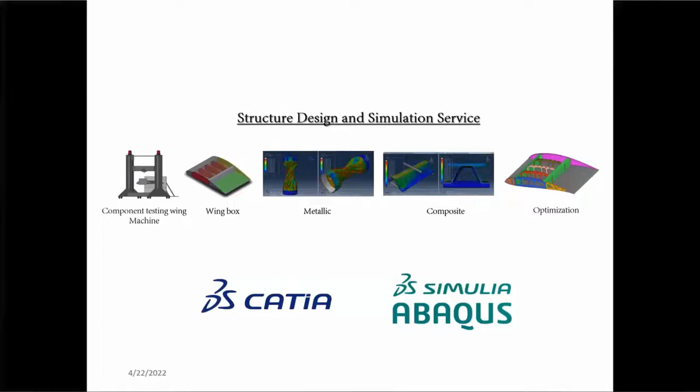ที่เป็นคาร์บอนไฟเบอร์เพียว 100% และสามารถรับแรงใช้งานได้จริง มีค่าความแม่นยำระหว่างการทดสอบกับ FAE ไม่เกิน 10% ซึ่งถือว่าน้อยมากในระดับ component testing ทีนี้ขอพูดภาพรวมก่อนว่าโปรเจกต์นี้ GISDA ร่วมทำกับมหาวิทยาลัยบูรพา กับ ดร.ลอเรนซ์ และบริษัท Aerowork โดย Aerowork สนับสนุนด้านการผลิต manufacturing ส่วน ดร.ลอเรนซ์กับ GISDA ร่วมในเรื่องเทคนิคการออกแบบและการทดสอบ ซึ่งเรามีการทดสอบไล่มาตั้งแต่ coupon test, element test, component test

level และ full scale ซึ่งการทดสอบเหล่านี้เราใช้ facility ของ GISDA ทั้งหมดในห้องปฏิบัติการ Galaxy เริ่มแรกเราต้องหา material property เพื่อเอาไปใส่ในซอฟต์แวร์ Abaqus โดยต้องทำการเทสก่อน สิ่งที่เราเทสก็มี tensile, compression, in-plane shear แล้วก็ flexural strength

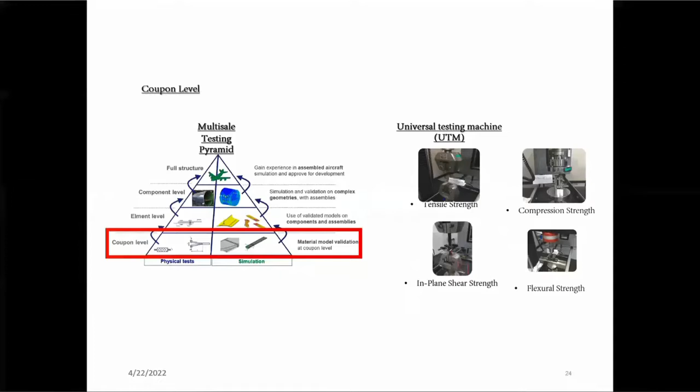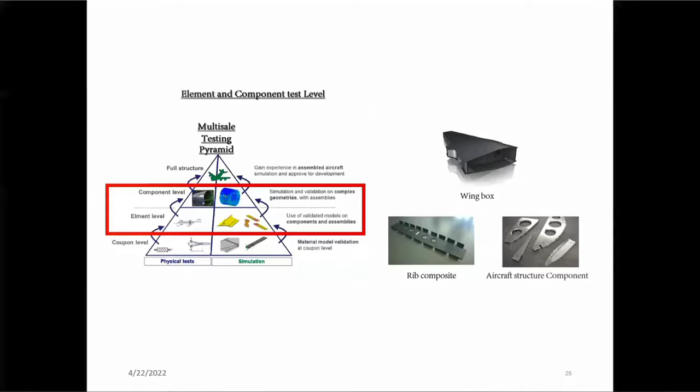พอเราได้ค่า property ของวัสดุ carbon fiber มาแล้ว เราก็เอาไปใส่ในซอฟต์แวร์ Abaqus ในฟีเจอร์ material property พอได้ material property แล้วเราก็ออกแบบโดยใช้ CAD computer design มาออกแบบริบในระดับ component element level ก่อนที่จะไปประกอบเป็น wingbox โดยใช้วิธีการทำ FEA อย่างภาพแรกเป็นริบของตัว spoiler และตัวล่างเป็นริบที่เป็นคอมโพสิตที่เราพัฒนาขึ้นมา เราเริ่มจากการทำเล็กๆ ก่อน

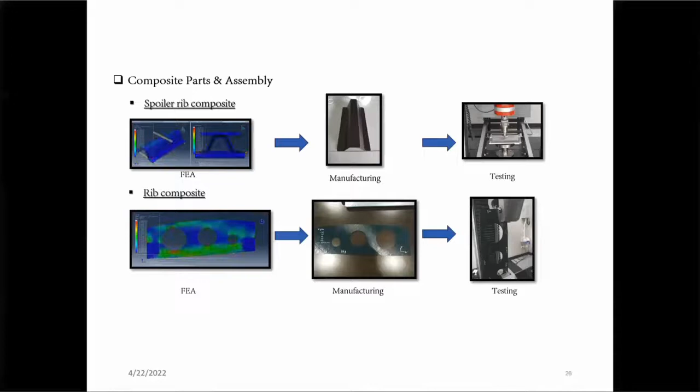แล้วก็มี manufacturing เอาที่ออกแบบจากซอฟต์แวร์ Abaqus มาทดสอบ มาผลิต แล้วก็เทียบค่ากัน ดูว่าค่าที่รันออกมาจากซอฟต์แวร์กับค่าที่ทดสอบจริงเกิด error กันเท่าไหร่ ซึ่งในระดับ element test ไม่เกิน 5% ตรงนี้เป็นค่า reference ที่ยอมรับได้ เราก็เอาไปพัฒนาต่อออกมาเป็น wingbox

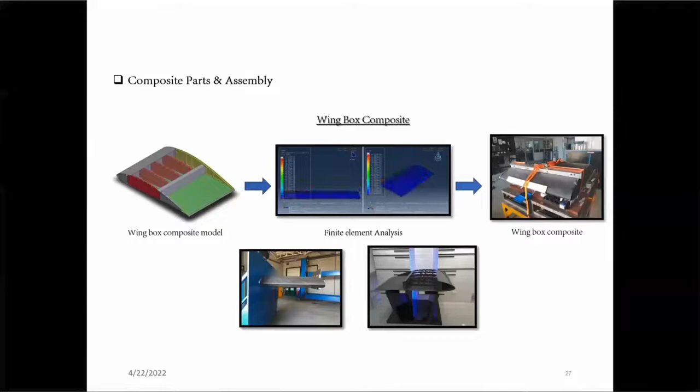wingbox ในระดับที่เป็นส่วนหนึ่งของปีกเครื่องบิน โดยใช้วัสดุคอมโพสิต ใช้คาร์บอนไฟเบอร์เพียว 100% ทั้งหมด แล้วใช้ Abaqus ออกแบบการเสริมแรง ว่าต้องใช้กี่พาย ใช้ direction ไปทางไหน orientation เป็นยังไง stacking sequence เป็นยังไง ซึ่ง Abaqus สามารถใช้ในการออกแบบได้หมดเลย

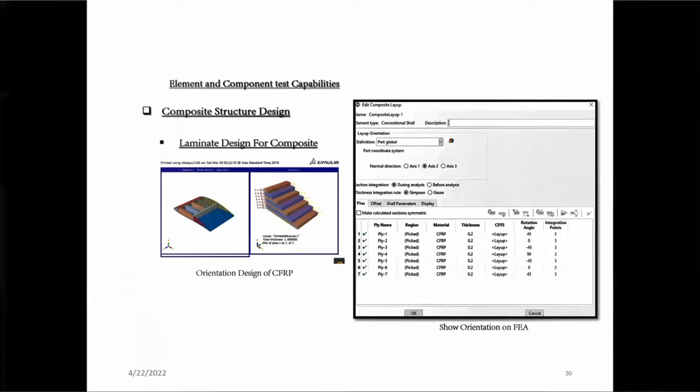นี่คือหน้าตาฟีเจอร์ของ Abaqus ที่เราใช้ในการออกแบบ และนี่คือการออกแบบดีไซน์ในเรื่องของ stacking sequence Abaqus มีในเรื่องของ layup แล้วก็ใส่ material property สุดท้ายพอเราใช้ Abaqus ออกแบบ composite wingbox มาทั้งหมดแล้ว เราก็ต้องมีการทดสอบในระดับ component test เพื่อเปรียบเทียบค่า

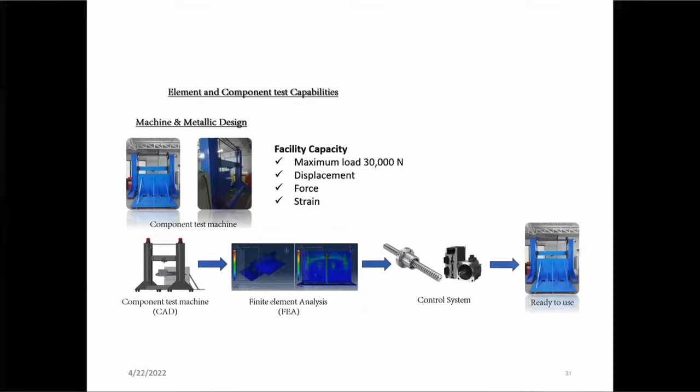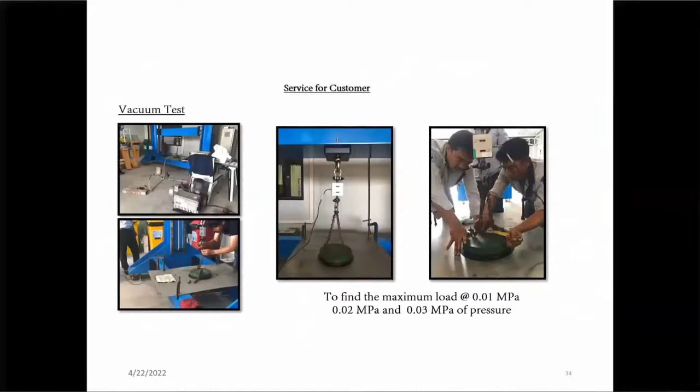ไม่ว่าจะใช้ strain gauge, load cell, หรือ displacement ในจุดที่เราสนใจ อย่างเช่นจุด peak load ที่เกิดขึ้นบน surface ของ carbon fiber เราก็เอา strain gauge ไปแปะแล้วทำการทดสอบใน condition เดียวกับที่รันใน Abaqus แล้วเทียบค่ากัน ผลออกมาไม่เกิน 10% ถือว่าเยี่ยมมาก ตรงนี้ GISDA ก็ได้โปรโตไทป์ที่เป็น wingbox คาร์บอนไฟเบอร์เพียว 100% ที่มีน้ำหนักเบาและมีความแข็งแรงตรงกับแบบที่ออกแบบไว้ ในส่วนของ GISDA ก็จะหมดเพียงเท่านี้ เดี๋ยวในรายละเอียดเชิงเทคนิคขอส่งต่อให้คุณลอเรนซ์ นักวิจัยที่ร่วมพัฒนาคาร์บอนไฟเบอร์วิงบ็อกซ์ตัวนี้กับ GISDA อาจารย์จากมหาวิทยาลัยบูรพา

So good morning everyone and thanks for joining this seminar today. You can call me Lauren. I'm adjunct at Burapha University in material engineering and my specialty is composite design and simulation mainly for aerospace.

So before starting, I will just introduce you very basically and from an industrial point of view what simulation is and what the advantage of simulation is.

So finite element analysis, FEA, is a process of simulating the behavior of a part or assembly. It can be one part or an assembly of different parts under different conditions, different loading, using FEM, finite element methods. It can be mechanical, electrical, or thermal engineering, and we can combine these different types of solicitation.

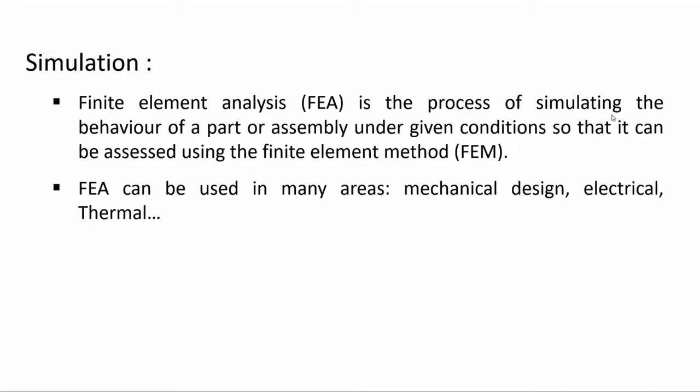But today I will just talk about mechanical design, mechanical numerical simulation. So what is the advantage of numerical simulation? If we summarize the design process without simulation, we start with the concept, the design, the concept of your product.

Then you design, and then you need to validate your design. It can be very long to validate in terms of time and cost. And when you are happy with your design, you can produce. If you use simulation, you use FEA to design and optimize your product, so you can save time on validation because you have the step before, meaning FEA, where you can already optimize your part.

And if I zoom into the design and FEA step, I summarize FEA by creating the CAD, the 3D part, the model construction - that's a big step - and then optimization. What I want to say today is in FEA, the most difficult part is to build your model, to construct and create your model.

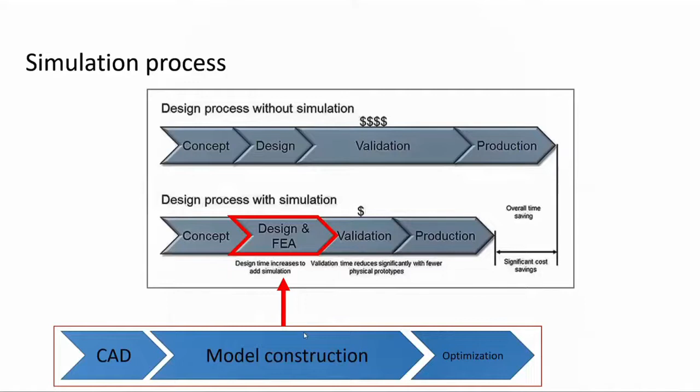So in conclusion, FEA saves time and money. Many companies in Thailand ask me what is required, what is needed to use simulation - so what are the inputs of FEA? The first input is the geometry.

So this is the 3D part. It can be IGS or STP in terms of format. You can use Catia - Catia is very good, it's one of the best software for CAD. But it can be another one, no problem, you just need to be able to save in IGS and STP format.

Then you need all the forces, the loading, in terms of magnitude and location - where you apply, how many, and what is the magnitude, the Newton, the load you apply - and the fixed condition. It should be boundary condition to be more accurate; for this presentation I use fixed condition, so where you fix your part, where you fix your geometry. For example, for this geometry, we fix the bolt, the hole of the bolt.

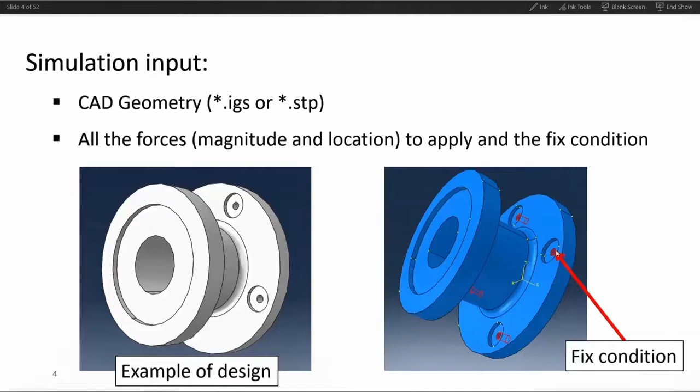In terms of input, we need the mechanical property of the materials you use. In industry, we use elastic property, so we need Young's modulus, Poisson's ratio or shear modulus - it can be one of these two properties. Yield strength for metallic materials and polymers, failure strength for ceramics because they're brittle, and for composites we need more properties because we have the fiber direction.

Many companies ask me where I can find material properties. The first source is the manufacturer or provider. For example, here you have the data sheet of Toray for this carbon composite. They give you the tensile strength, modulus, compressive properties.

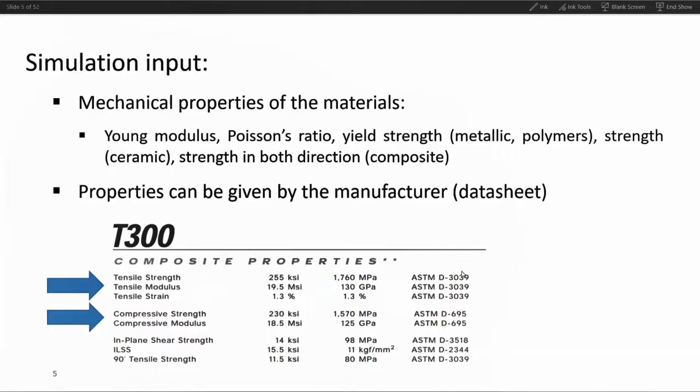They give you some properties, and the standard they used to perform the experiment. But if you don't have the data sheet, you can find in the literature or Google something close to your property. But if you really want your property on your material, on your product, you have to do a mechanical test.

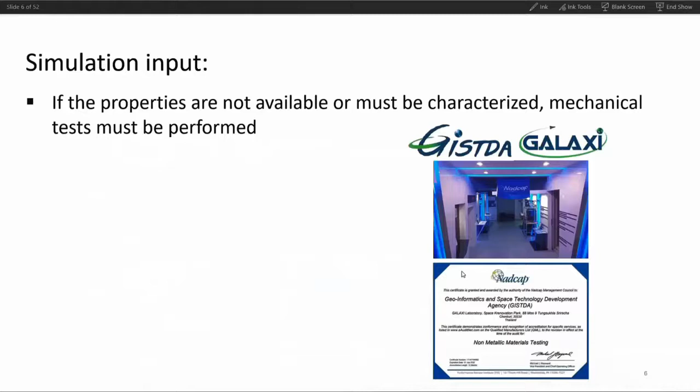As Mr. Kittigan presented, GISTDA through GALAXI has the capability to perform ASTM tests, both composite and metallic, under NADCAP standard, one of the top standards in the world. So you have to produce your coupon, a small specimen like this, following the standard.

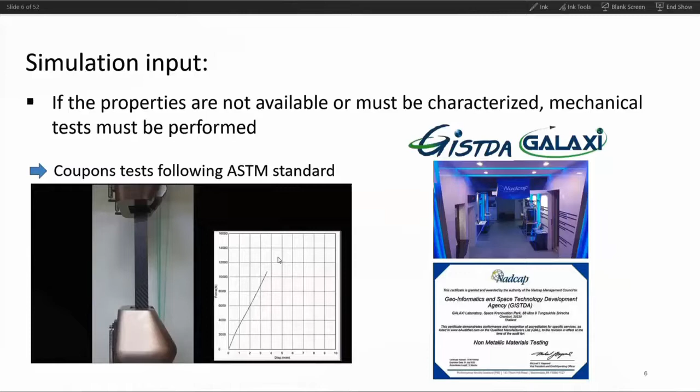You apply the solicitation you need and measure your property. What we need is the design allowable. This comes from you, from the industry. For example, it can be the maximum displacement you agree to have, the maximum stress, the safety factor you apply, etc.

And for optimization, what is most important is the industrial constraint. Optimization must be performed in accordance with the company, because we can do what we want in FEA. We can do everything. There is no limits, there is no physical limits, it's numerical.

But the product, the part you produce, has some constraints: thickness constraint, material available, manufacturing constraint, etc. So to optimize, we must know what the company or industry can produce. We cannot optimize without the company feedback. This is very important, the relation between the company, the industry, and the person, for example GISTDA, who performs the FEA.

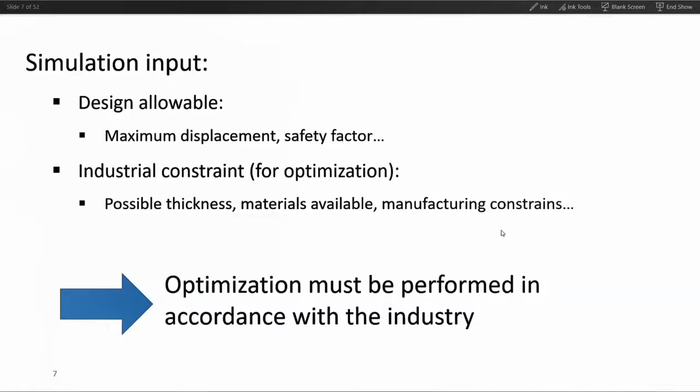So I will make a small presentation on sandwich structure. It's a simulation we performed in Thailand. First, what is a sandwich structure?

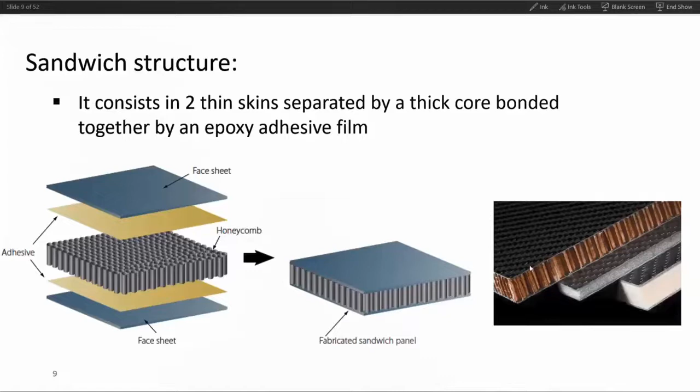What is the advantage? In fact, a sandwich structure can be compared to the I-beam used in construction. It's the same idea exactly: light and high stiffness. The core of the sandwich is the web of the beam, and the skin of the composite sandwich is the flange of the beam. It's the same thing.

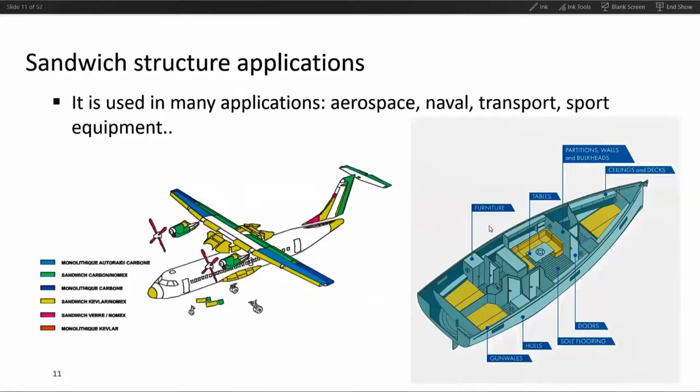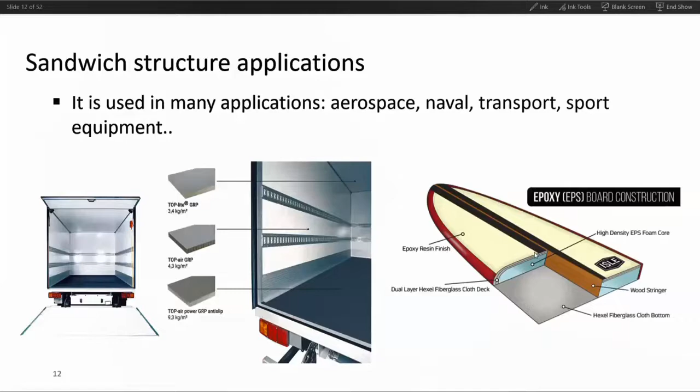So very light with high stiffness. It is used in many applications: aerospace, for example flaps, some doors, wing parts, nacelles. Naval construction, also for furniture and parts inside the boat. Trucks, buses, or the subway—I'm sure the subway in Bangkok uses sandwich structure. And the sport industry also, for example surfboards are made with sandwich structure. So sandwich structures are used in many applications.

The skin needs to be light and with high strength, so mainly we use carbon and glass fiber and aluminum sheet. So composite, carbon, glass fiber, or metallic sheet.

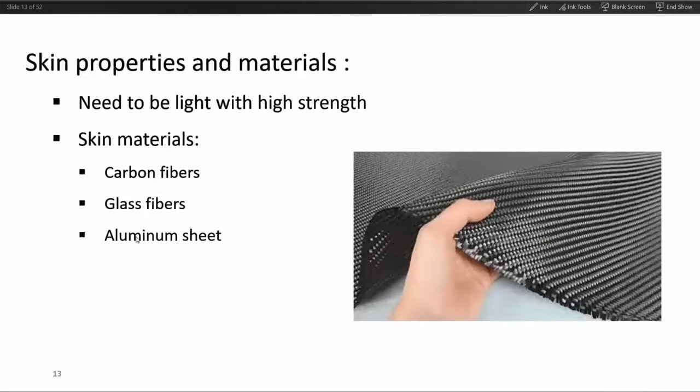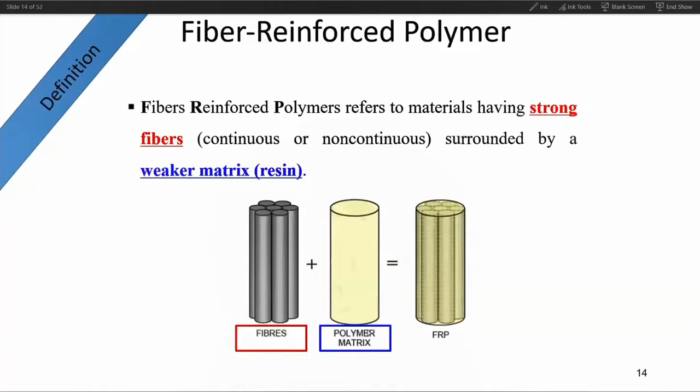Before moving to the next part, I would like to give you some definitions on fiber reinforced polymer, so composite. When we talk about composite, especially fiber reinforced polymer, we talk about fiber mixed with a polymer, or what we call matrix. So this is fiber reinforced by a polymer or matrix. What is important in composite is you cannot use the fiber like this to design your part.

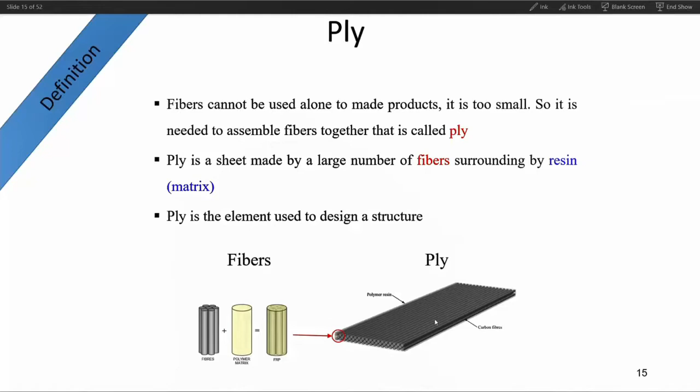So we use what we call the ply. The ply is a combination of fiber, many fibers, with the polymer, with the matrix. The ply is a basic element to design the composite. You cannot use just one ply when you design your part for the car or the fuselage. You need to combine the plies, and this is what we call the laminate. The laminate is a combination of plies, each with a different fiber orientation to optimize.

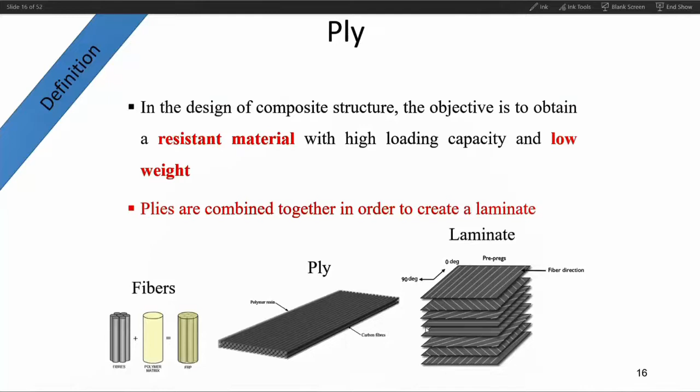So we have—I will summarize here.

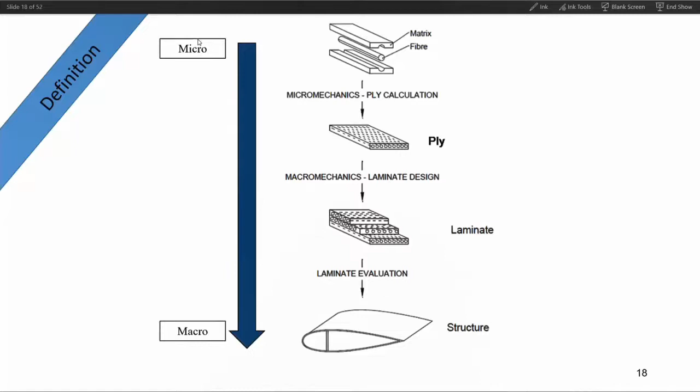So optimization of composite is not easy, and you have a large number of parameters. You can change the number of ply, the orientation of ply, the stacking, the size. So you understand that FEA is a very good tool to optimize composite, and I will show you.

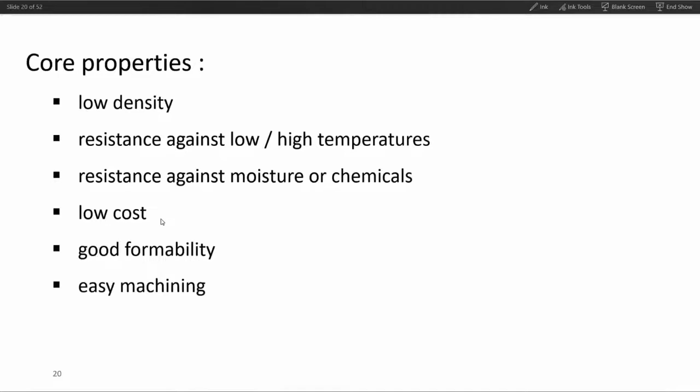So come back to the sandwich. We have the core. The core is low density, very light, cheap, easy to machine to give the shape, and has good formability to bend and give complex shape to the part.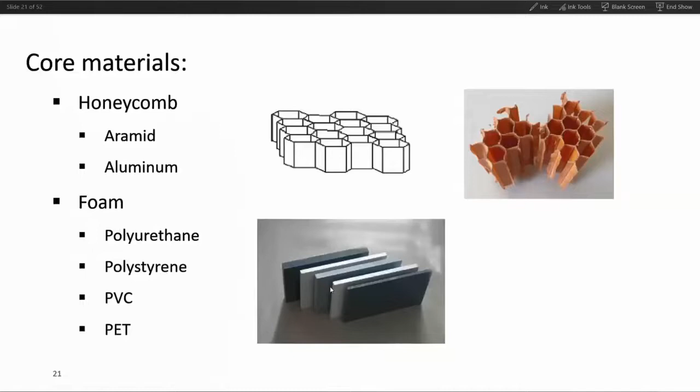So sandwich, when you want to design a sandwich, when you want to optimize, you have the core material, its density, the thickness. You can change the skin, the material, the thickness, the layup for composite. So you have many parameters to investigate.

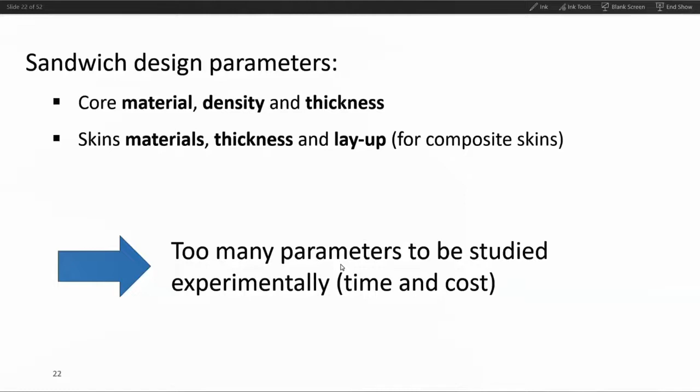And if you want to do this experimentally, if you want to produce and test, it's very expensive and you need a lot of time. So from an industry and company point of view, it's not possible, it's too expensive. That's why we use FEA to simulate the sandwich.

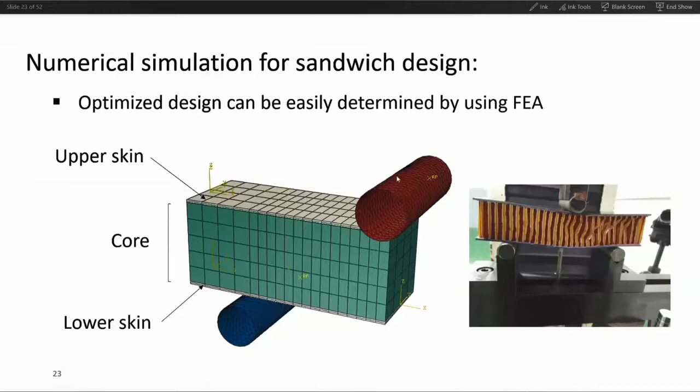And as you can see, the core, the green part, uses 3D elements, it's a volume, and we don't simulate or design the honeycomb - we don't design the shape of the cell. We don't do this, it's just a volume, and the property of the honeycomb is used for this volume, the green part. So there is no need to design the honeycomb with all this detail. It's too expensive, too slow. You don't need it.

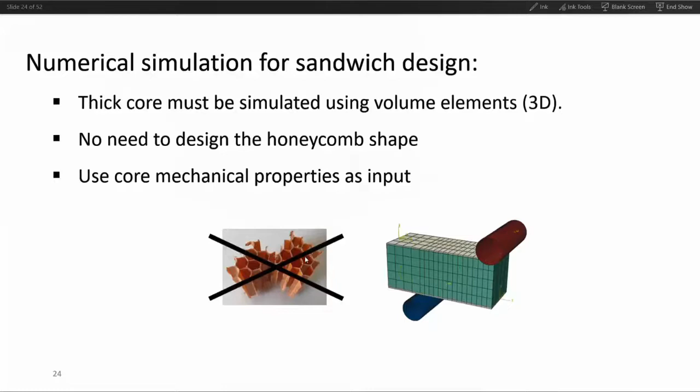We impact, so we damage the sandwich.

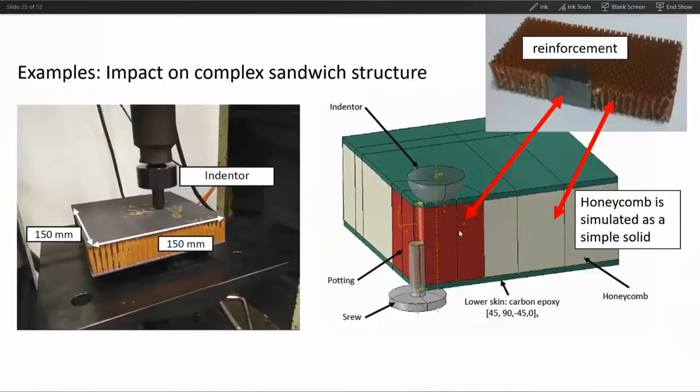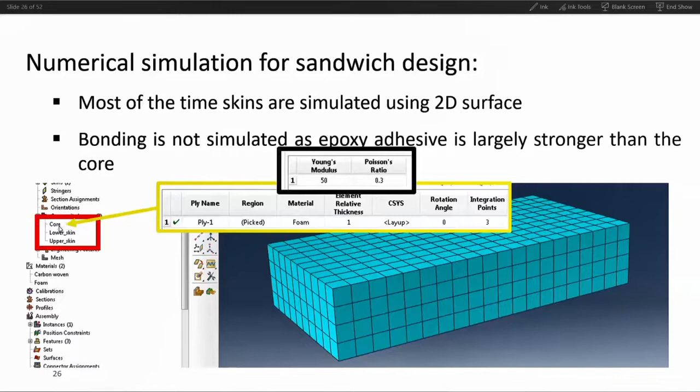And if I open - I don't have Abaqus, so I have a print screen for you. If I double click on core, in fact, you have the definition of the core. So we can see we have the foam. And if I double click on the foam, we have the mechanical property of the foam. So the mechanical property related to the foam is injected into the core material. And the same for the skin.

And if I double click on the material, you can see the property input. So this is the data: Young modulus, Poisson ratio, shear modulus. So this is typically the Abaqus interface. It's very easy to implement this in FEA, and this property comes from experiment and datasheet from the provider.

So it's very easy in FEA to change any parameter. We can change the thickness, the angle, the property, or combine different materials. So you can understand that FEA is very useful to optimize your part. You save time, you save money.

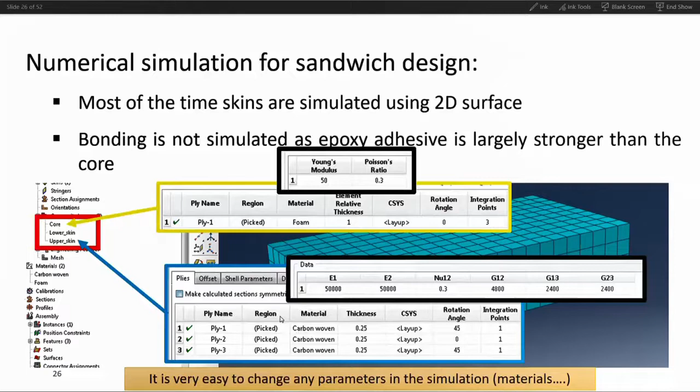Now I would like to jump to the next presentation, on the real application for the high altitude pseudo satellite, the HAPS, where we design and optimize the wing structure we call the wingbox at G-Star.

Drones are used in many applications. I will go very fast: agriculture, forest observation, security, urban development, military application, etc.

If we look at the different types of UAV, you have different types of UAV and aircraft depending on the altitude. Today we talk about HAPS. You see on the top right corner the altitude, 20 kilometer flight altitude. This type of drone flies in the stratosphere, so it's a very high altitude pseudo satellite drone.

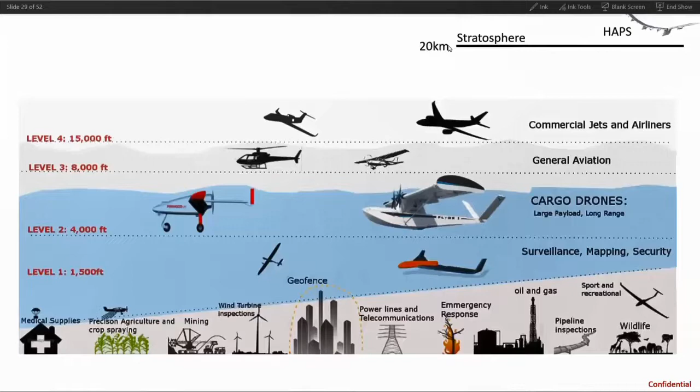This type of drone can fly for many weeks, almost one month. It is used for observation and communication applications. To fly for one month, the only energy you have is solar energy, so you use solar panels.

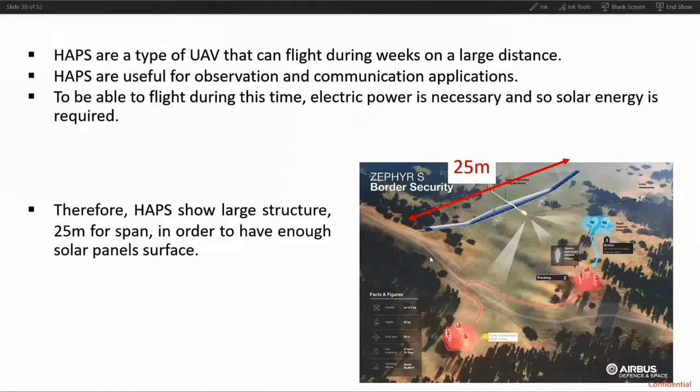The span length of the drone, the HAPS, is very high, very large, about 25 meters. So it's a very large drone. And you understand that you need to optimize the mass. Mass is the key of the drone - you save mass, you save energy, so you have more endurance.

This is a picture of the drone from Airbus. You can see the shape, it's a very light structure. And we try at GISTDA to design this type of drone.

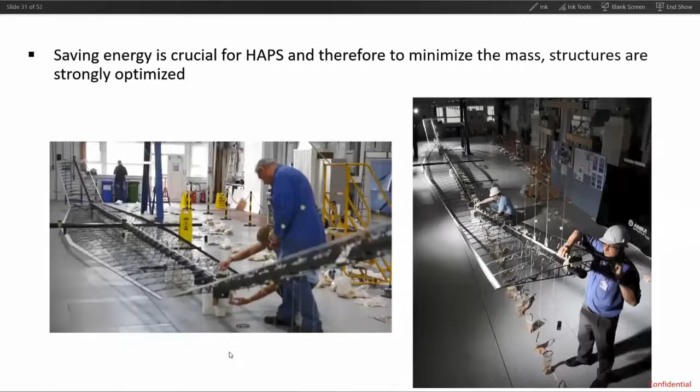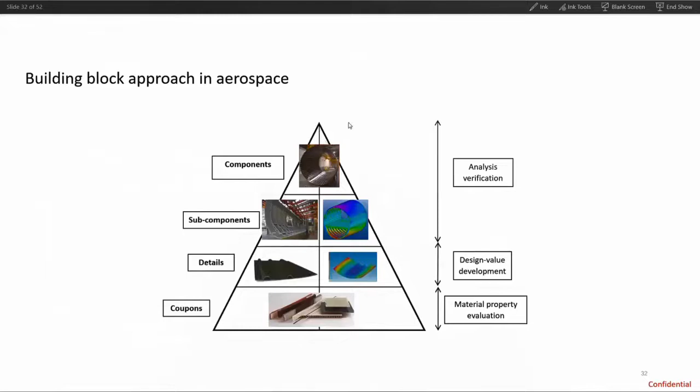Mr. Kittigon already presented this type of building block approach used in aerospace. We have on the bottom the coupon, then it's more and more complex, and at the end you have the drone.

The objective of the project was to design and optimize an aerospace product and to perform the mechanical test of this structure.

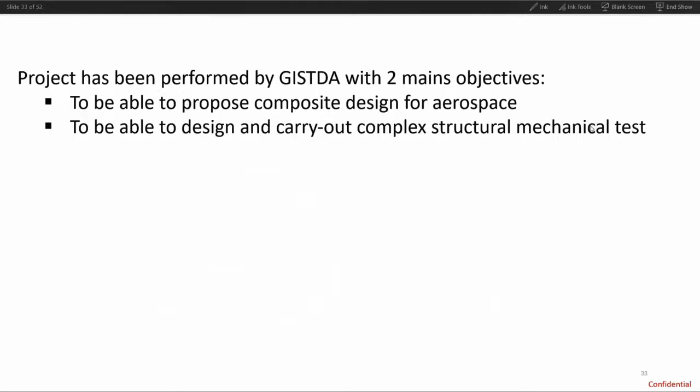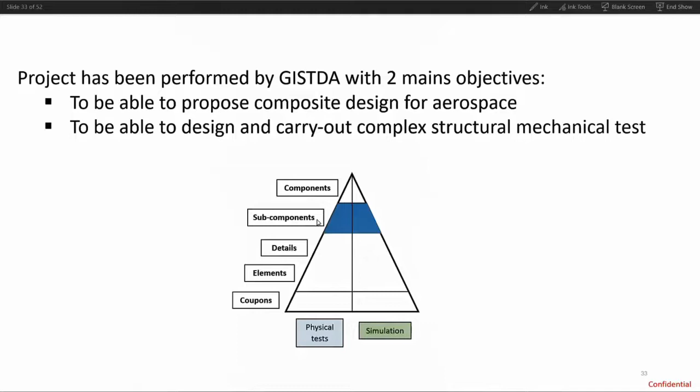So we want at GISTDA to be able to perform this type of test, which means on the top of the building block approach - meaning complex design, complex test.

To perform this, we carry out a project on UAV HAPS: design and optimization of the composite wingbox. We produce the prototype with AeroWork company at Sriracha, Laem Chabang. We perform the mechanical test and validate it by numerical simulation.

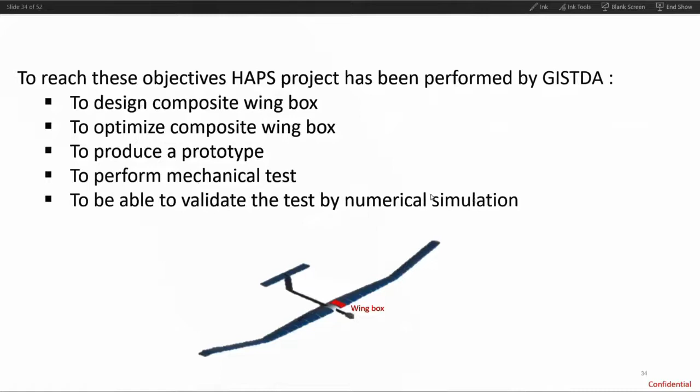Some definitions before we start. A typical wing structure has a beam; the beams inside along the wing are called spars. The part perpendicular to the spar, along all the wing, is called the rib. So I will talk about spar and rib - spar is along the wing, rib is perpendicular to the spar.

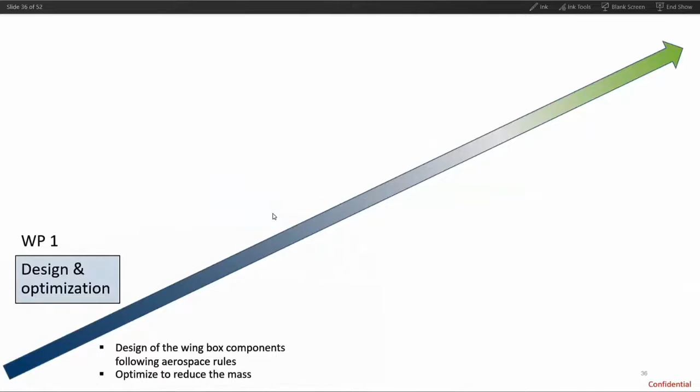First, we design and optimize the wingbox following aerospace rules. Then we manufacture the prototype, then we perform the test, and finally we perform the simulation and compare it to the test. So: design, manufacturing, testing, and finally comparing testing and simulation.

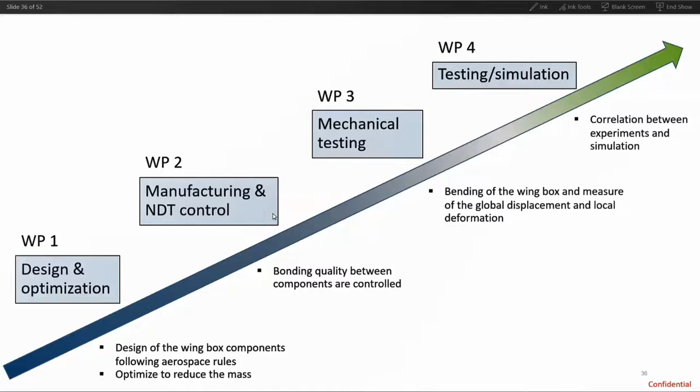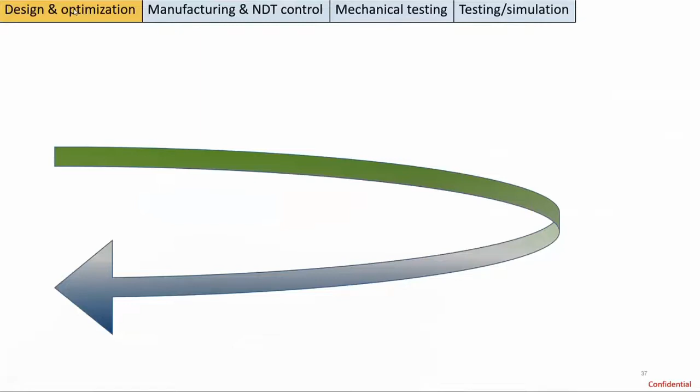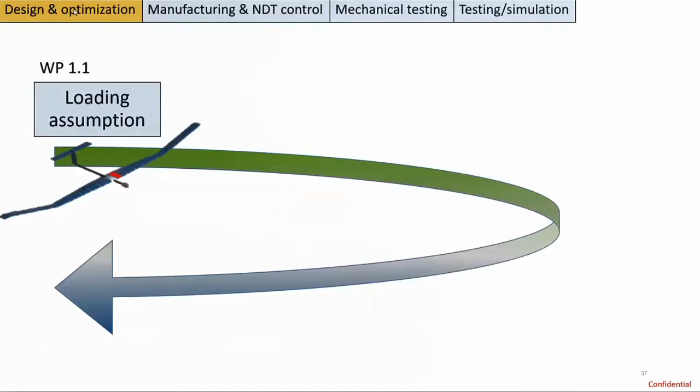So design and optimization work package, the first step. Firstly, we obtain all the load, the force applied to the wing. Then we simulate the full wing, the 12-meter wing.

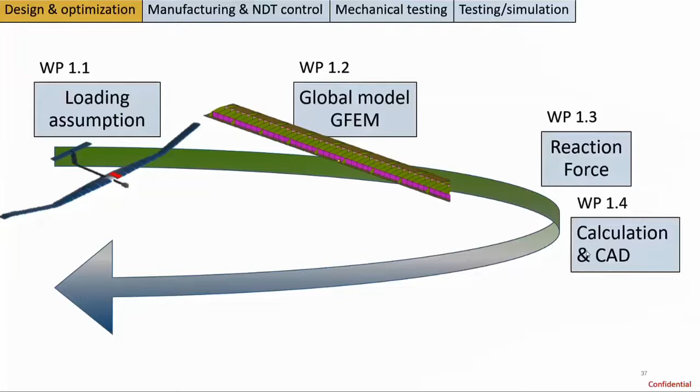Then we calculate the force inside the wing. We create the CAD using CATIA, then we create the detailed model, and finally we optimize to reduce the mass.

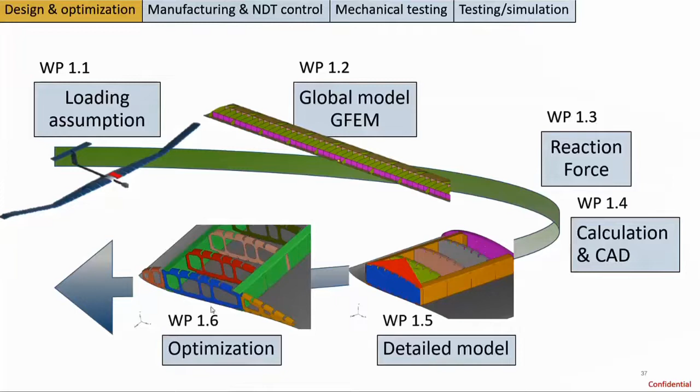Load assumption was done before the project at GSTA. We use a CFD application to simulate the wing and obtain the aerodynamic force. I will not present this today - the load was obtained before the project.

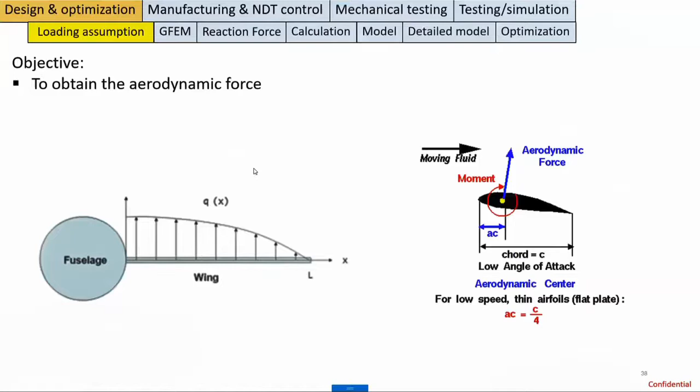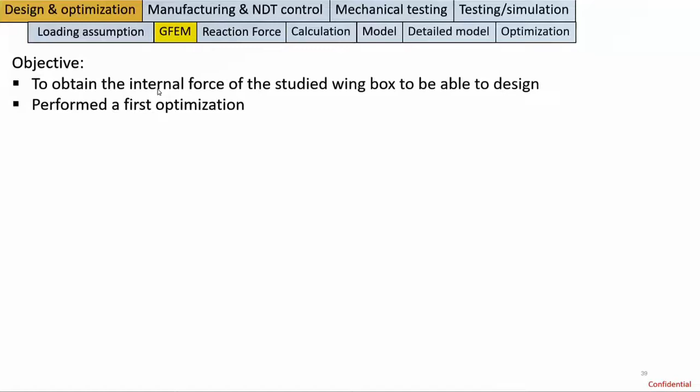Then we want to obtain the force inside the wing and perform a first optimization. So we design under CATIA the wing, 12.5 meters. You see the full wing - very basic geometry, very basic approach.

We apply the force we calculated before and optimize the thickness of the wing. You see the color is related to the thickness - this is the first optimization of the thickness. So we reduce the thickness of the wing where we can until we reach our objective, just as a first quick approach.

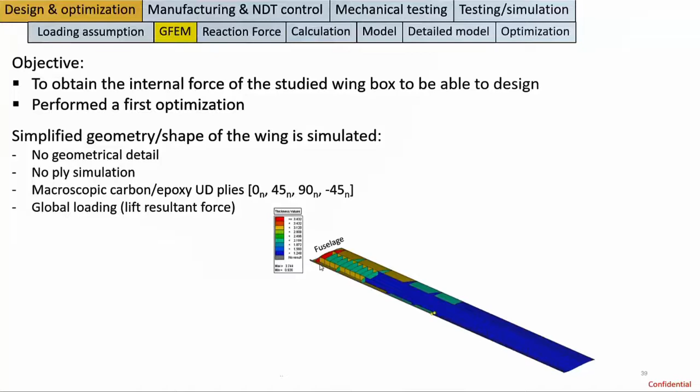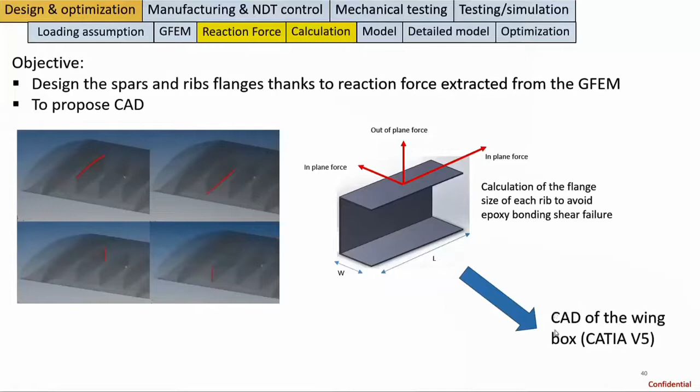Using this, we calculate from FEA all the force between the rib and the structure. This is the rib here, in black. Using the force, we can design the rib, the shape of the flange of the rib. And using this, we can create the CAD. We use Catia V5 at GISA.

Then we have the simulation, the model of the wingbox. So first, very basic geometry. Always start with the easiest approach because it's fast and you can avoid mistakes, so you save time. Very basic first, no geometry detail, very basic shape, static analysis.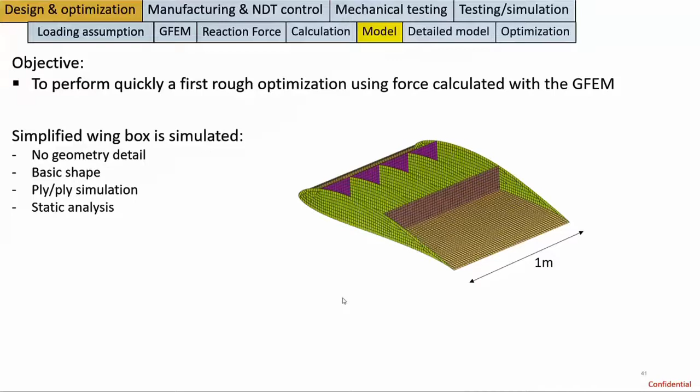We very roughly optimize the structure, and then we create the detail. As you can see here, we have all the shape, all the parts. So the spar here, spar 1, spar 2, in a range, and we have different ribs, and you see the shape. Now we use the detail shape and we optimize, using the rules of aerospace, the failure, the Hill criteria and the strain.

So this is an allowable, I talked about before. We use this here, and we optimize the structure.

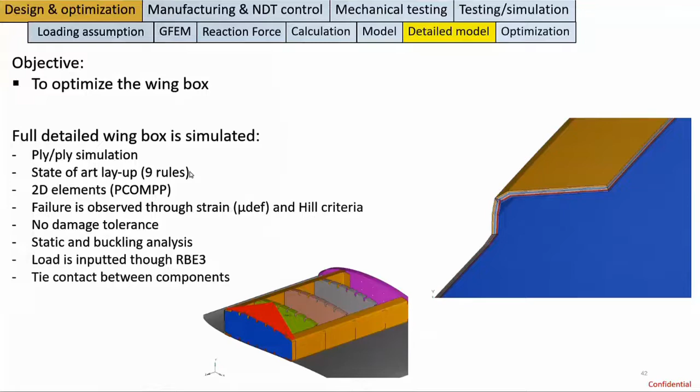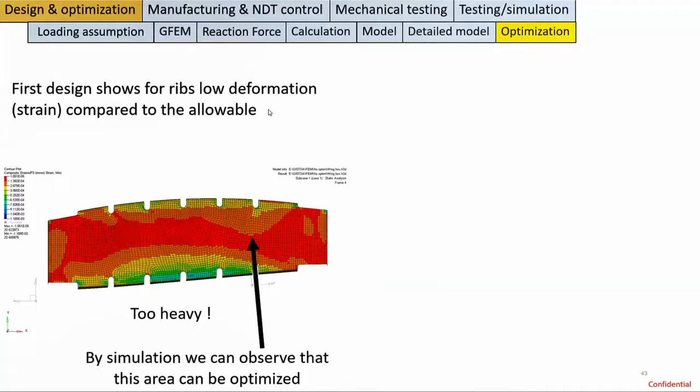So I will just give you one example, for one rib. By example, this part, the rib. By simulation, we can observe this area can be optimized. Here, the values are very low, so we can reduce the mass. The part is too heavy.

So in fact, all this area, we can reduce the thickness. And what we did is we hollow the structure, we create holes to save mass. So we save 40% of mass between the first design and the last. You see, we save 40% of mass. And when we are happy, we manufacture the part.

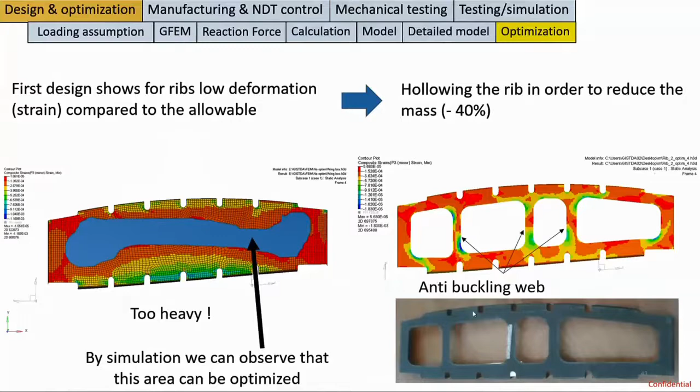Then when everything was done, we manufacture the wingbox. As you can see, we have the full structure with the optimization. You see the holes in the part, so we save a lot of mass.

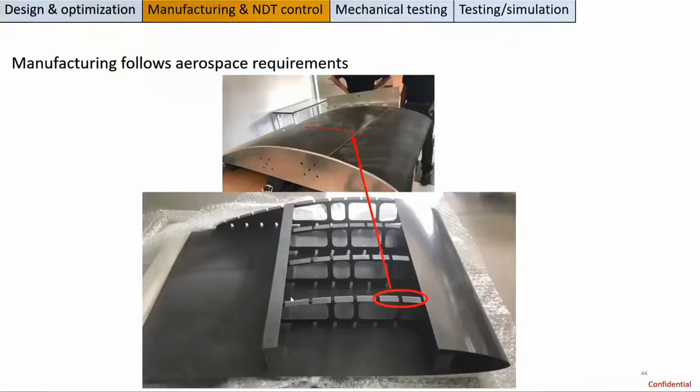And next, we test the part. As Mr. Kittigan presented, we do a bending test on the wingbox. We apply the force at the end. We have the load cell, so we measure the force and displacement. The objective is to validate the complex, to perform the test and to validate by simulation.

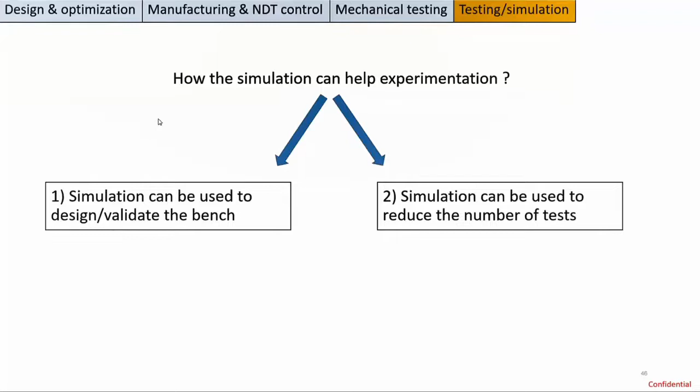So how can the simulation help for experiment? FEA can be used for experimental approach. For one, to design the bench - before doing the test, you can check the bench you use. And two, if you can simulate the test, if you can simulate the experiment, you don't need the experiment at the end, or you can reduce the number of tests.

If you can simulate the test, if you are able to perform the test by numerical simulation, you can reduce the number of tests.

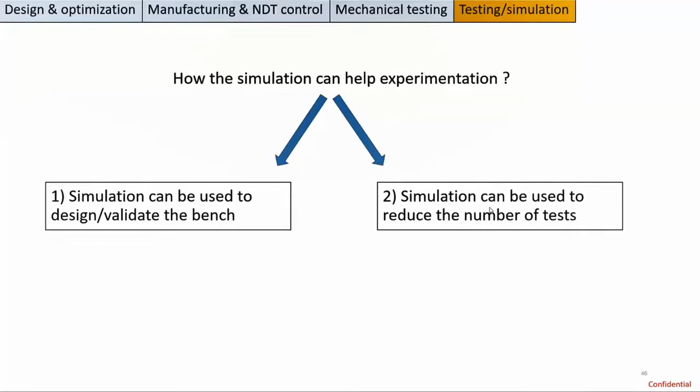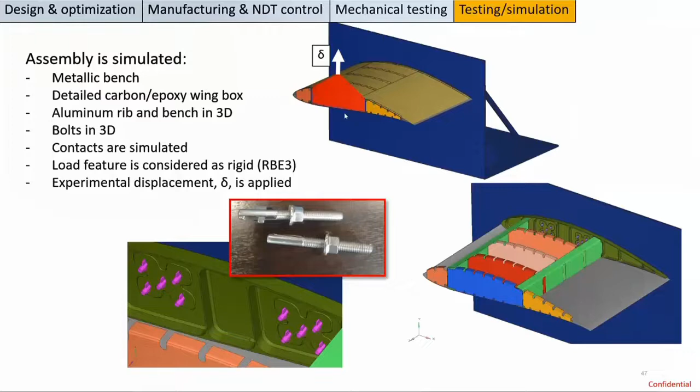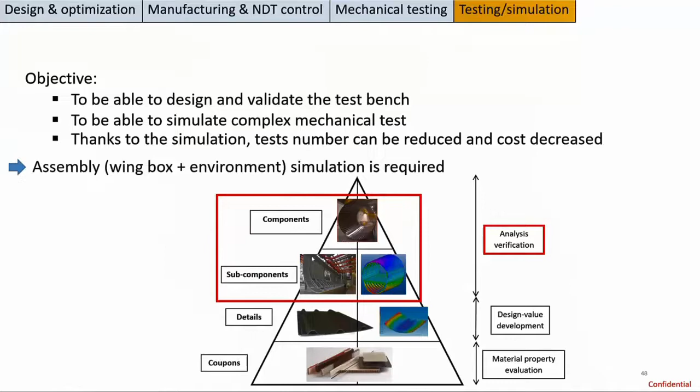And the first thing we did is, we want to be able to design and validate the test bench. We want to simulate the complex mechanical test. And thanks to the simulation, we can reduce the test number. So we simulate everything - in the block approach, we are at the top level in terms of complexity.

And for the first objective, before producing the bench, so before testing, we check by simulation the stress in the bolt. We check the bolt and we check if we have failure. In this simulation, we show we didn't have failure, so no failure in the bolt. We are confident we can test the wingbox. We know the bench will not fail.

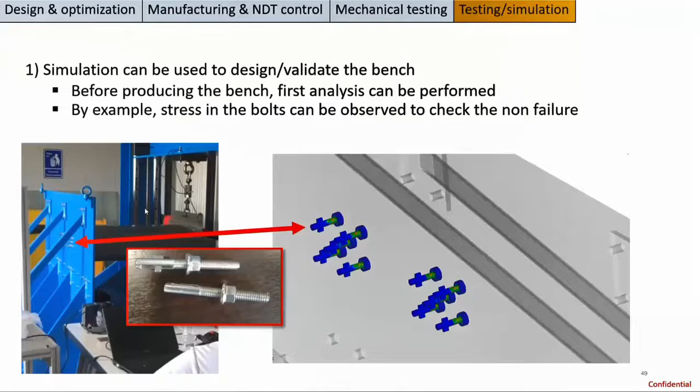And last, after experiment, we compare the experimental results in terms of displacement. We compare the experiments and the simulation. And we also validate by checking the strain and the failure criteria in the model. So we check everything, in fact, in the model.

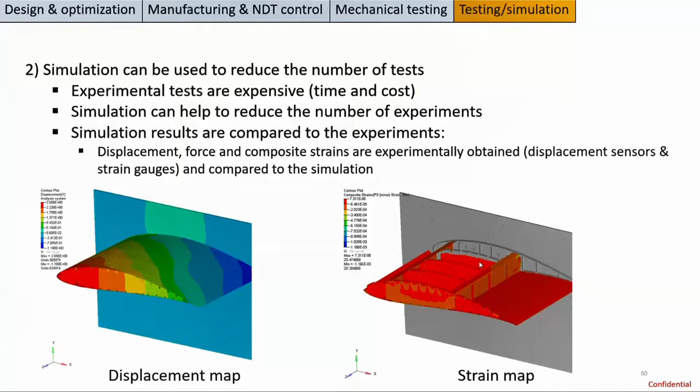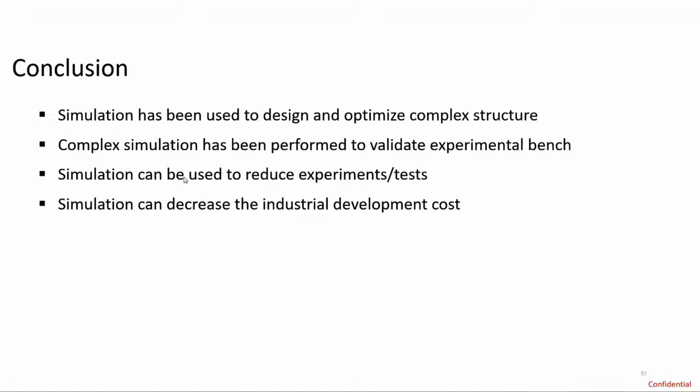So, conclusion: the simulation has been used to design and optimize the complex structure. We use the simulation to design the bench, to validate the bench. And now we know we can use simulation to reduce the number of tests. So if you have a complex part to test, we can simulate first to save time. Finally, simulation saves time and money for the industry, as we showed. So thank you very much.